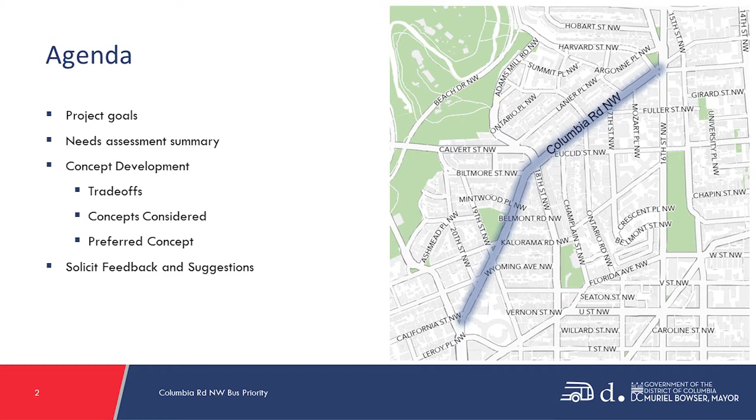We'll talk about DDOT's process for concept development, some of the trade-offs necessary to achieve the project goals, and concepts that DDOT evaluated for the corridor, including a concept that DDOT prefers at this point based on technical considerations. But we want to hear from you before making any decisions, and I will share the best ways to do that later in the presentation.

I am on the bus priority team at DDOT, and reducing travel time for buses in this corridor is a key goal. However, safety is a goal for every one of our projects, and this one is no different. All of the concepts I describe in this presentation will go through a design process that ensures safety is engineered into the roadway design.

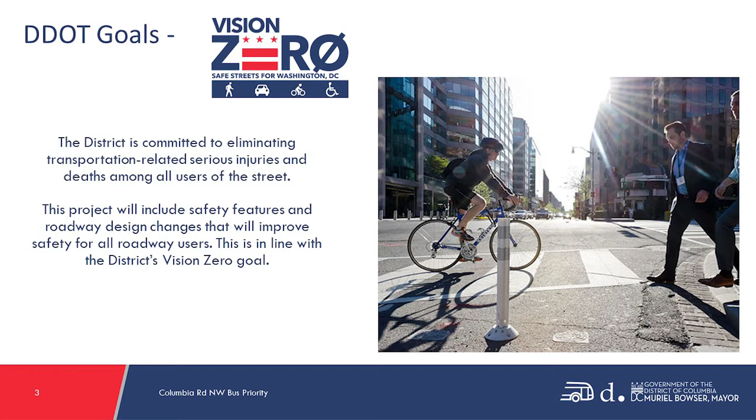The district is committed to eliminating transportation-related serious injuries and deaths among all users of the street. This project will include safety features and roadway design changes that will improve safety for all roadway users in line with the district's Vision Zero goal.

This section of the presentation will provide a brief summary of the needs assessment performed in the first phase of the project. This phase was necessary to define the problems we are trying to solve for. I want to sincerely thank everyone who commented during the needs assessment, because the information you provide by spending every day on Columbia Road is irreplaceable.

We received over 100 comments through the project website, emails, and in-person conversations with people on Columbia Road. The most frequent comment indicated that the corridor is unsafe for biking. Most commonly, people attributed that to parking violations, inadequate infrastructure, and reckless driving. People frequently requested protected bike lanes in the corridor and improved crosswalks.

Many people's comments included detailed recommendations and narratives. I read every one of these comments and appreciate the time people took to share their stories. This information will help inform the design as we move forward and make the project better.

Some examples of what people said in their comments: 'I'm sick of having to fear for my own and my loved ones' lives just getting around the city.' 'I think a lot more cyclists would use the street with a dedicated bike lane and space for multimodal transit users. Buses move so slowly through the space.' 'The 42 and 43 buses are so slow and unreliable that I often take the 16th Street buses instead, even though they're not as direct for my trip.'

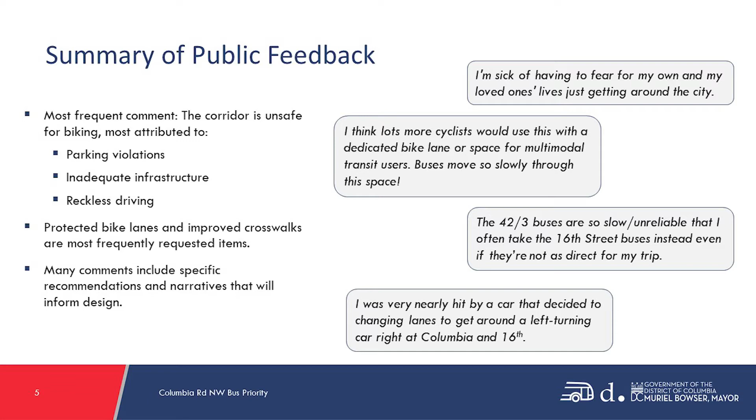This project is focused on solving a number of problems on Columbia Road that were determined during the needs assessment. You will hear these three problems and the goal of solving them throughout this presentation. The first problem we will try to solve is that there are unsafe conditions for vulnerable roadway users on Columbia Road.

Vulnerable user is a term that primarily refers to people walking and biking. They don't always make up the majority of people on the street, but they are more susceptible to injury and crashes. On Columbia Road, approximately 25% of crashes involved people walking and biking, but two-thirds of the injuries were people walking or biking. One aspect of this problem, seen in the image on the right, is that the bike lanes on the corridor stop and start intermittently.

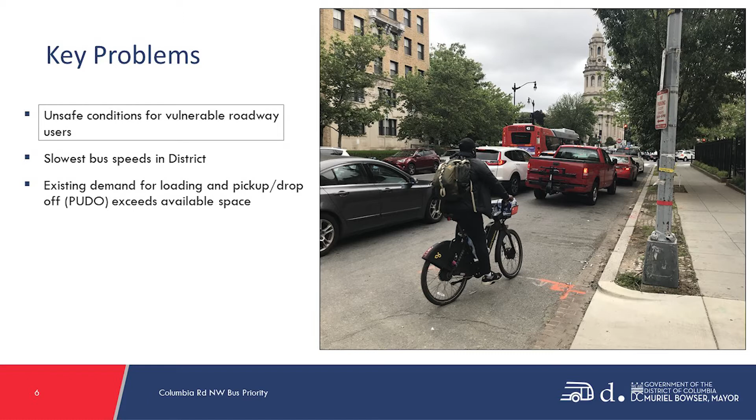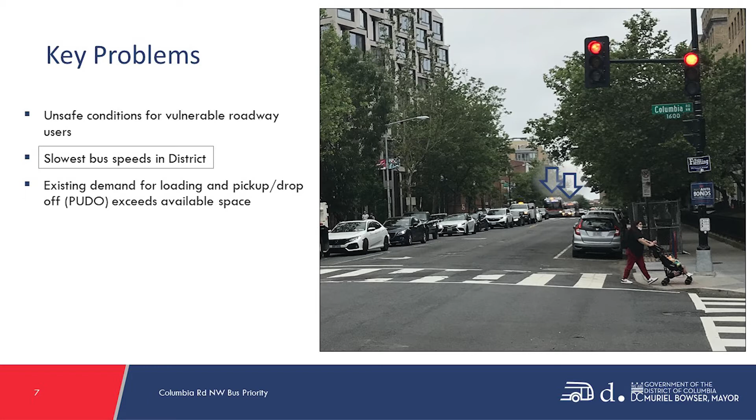According to system-wide performance analysis performed for the bus priority plan, Columbia Road had some of the slowest bus speeds in the district. In the image on the right is one of the worst locations for bus delays, on the approach to 16th Street. It often takes buses 4 or 5 minutes just to go from 17th Street to 16th Street. This project will aim to develop solutions to reduce their travel time.

Lastly, one of the great things about Columbia Road is the mix of ground floor retailers. However, it also presents a problem because the demand for commercial loading and pickup and drop-off, also known as PUDO, exceeds the amount of space available to them.

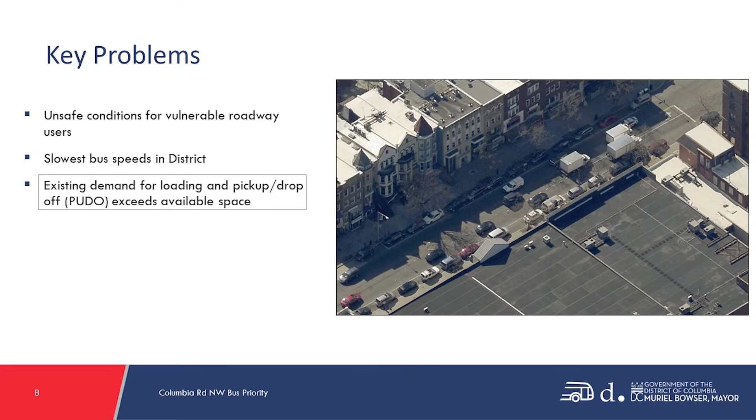Now I will go through some of the concepts proposed to solve these problems and describe the process to arrive at these concepts.

As part of the strategy for this project, we need to set priorities and see where we can get the most value from all these different roadway functions on different parts of the street. We are focused on three key requirements to solve those three problems: enhance safety, especially for vulnerable roadway users more likely to be injured or killed in crashes, reduce bus travel time, and better accommodate commercial loading and access.

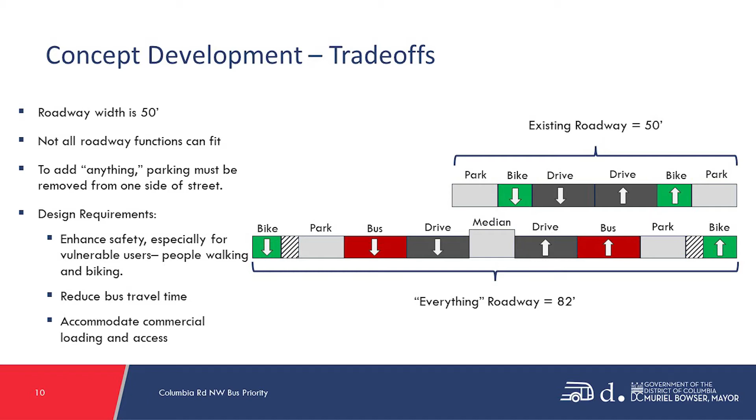When thinking about how to develop this concept, we divided the roadway into 4 sections, which each have unique attributes. The northern end, from 16th Street to 17th Street, has lighter loading demand but heavy northeastbound congestion, as I previously mentioned. Between 17th Street and 18th Street, there is extremely high loading demand, in particular on the block between Champlain and Ontario.

There's moderate loading demand on the other side of 18th Street to Belmont, where a number of restaurants and smaller grocery stores are located. There's also about a 20% reduction in traffic volume on the south side of 18th Street. Finally, on the approach to Connecticut Avenue, it's more residential with lighter loading demand, but there's moderate southwestbound congestion, particularly on the approach to Connecticut Avenue.

As part of our concept development process, DDOT evaluated 6 concepts and identified a preferred concept based on technical considerations and community feedback received during the needs assessment. However, prior to determining the direction of the project, we need to receive community feedback on how these concepts will meet the community's needs.

Again, the primary technical criteria we used to evaluate these concepts was how they address the issues on the corridor, improving bicycle accommodations, reducing travel time for buses, and accommodating commercial loading and access.

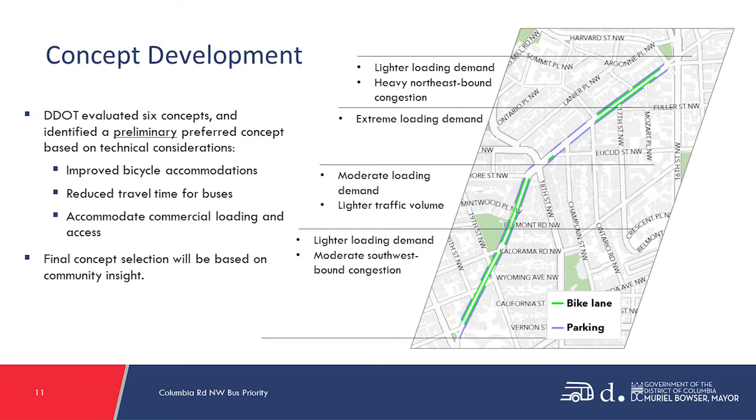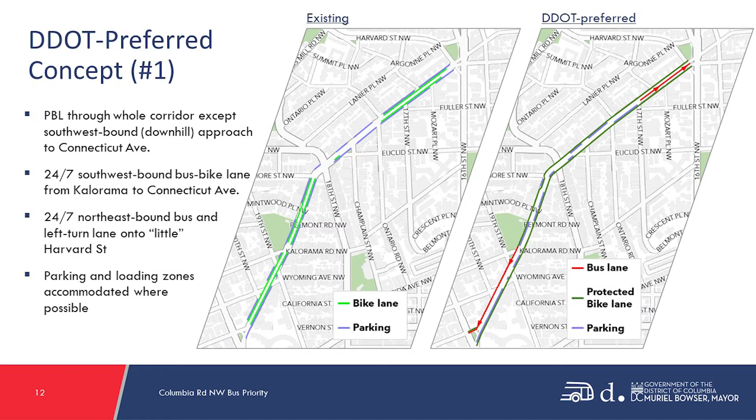First, I will tell you about the concept that DDOT prefers. This preferred concept would be a PBL through the whole corridor, except on the downhill southwest approach to Connecticut Avenue. It would provide a 24/7 southwestbound shared bus and bike lane from Kalorama to Connecticut Avenue, and a 24/7 northeastbound bus and left turn lane onto Little Harvard, starting at 17th Street. With this configuration, we would still be able to provide parking and loading zones on one side of the street through most of the corridor.

Another concept we looked at was a 2-way protected bike lane. This is an attractive option because it provides a protected bike facility with the smallest footprint, so you can still fit a parking lane and potentially also a second parking lane or a bus lane on some of those key segments that are the most congested.

However, there are several issues with this approach. The width of Columbia Road would require substandard lane widths for many of the roadway functions. For example, we try to provide 2-way bike lanes that are greater than 8 feet wide where possible. Another problem is that it does not allow a seamless connection with the future bike lane on Connecticut Avenue, which will be one-way PBLs on each side of the street heading up to Columbia Road.

The other problem is that it would require a 2-way bicycle movement through a shared bus boarding platform. That means people would be getting off and on the bus onto a platform that people are also riding their bikes across in 2 directions. That's something we can do in areas with lower bus and bicycle ridership, but it's less appropriate on this corridor.

The other thing about building a 2-way protected bike lane is that we try not to have any left turns across the bike lane outside of a protected signal phase, where there is a green arrow indicating that drivers can cross and make a left turn, and a red light indicating that bicyclists and drivers should not cross the street at that time.

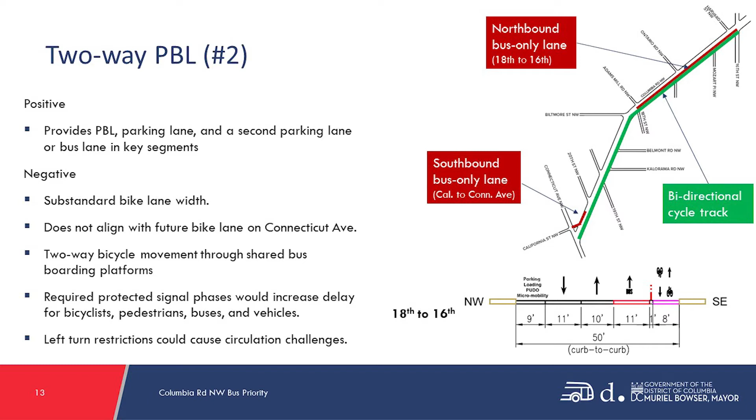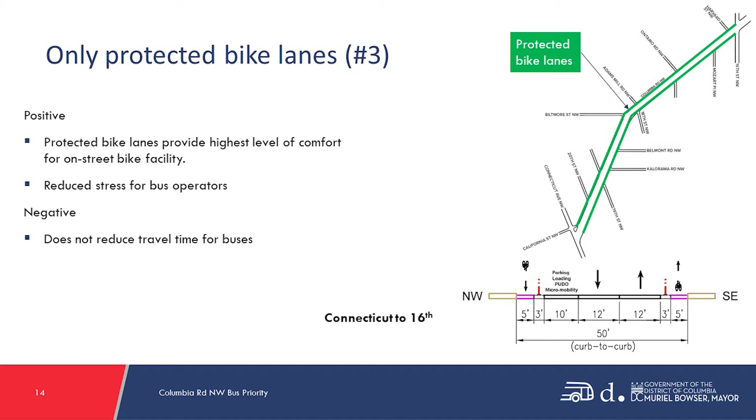The third concept that we looked at was to only add protected bike lanes. Protected bike lanes provide the highest level of comfort for an on-street bike facility. They also provide the advantage of wider travel lanes that would reduce stress for bus operators. The negative is that it does not reduce travel time for buses compared to some of the other options we provided. You will note that this is very similar to the DDOT-Preferred Concept, and the impacts to parking, which we will review shortly, are also similar.

In most of the concepts that we review, additional roadway functions are added by removing parking. This option goes a step further and evaluates removing a travel lane on Columbia Road for a segment in order to provide a bus lane.

As we already know, Columbia Road is one-way westbound east of 16th Street. This concept would extend that condition all the way to Euclid, such that cars can travel southwest but not northeast. Instead, beginning at Euclid Street, the northbound general purpose lane would become a bus lane. It's important to note that this concept is compatible with many of the other concepts we will be sharing on the south side of Euclid.

This concept would allow for parking on one side of the street between 17th and 16th, while the preferred alternative would remove parking from both sides of the street between 17th and 16th, and would allow reduced travel time for buses through the most congested part of the corridor.

However, based on analysis of turning movement counts, trip routing to nearby origins and destinations, and trip records from ride-hailing apps, Columbia Road serves mostly local traffic. This means that if a closure occurred, northeast-bound trips would not all be dispersed to alternative east-west corridors. And there is therefore a strong concern that many cars will still need to access Columbia Road, and so they will just do it from the other direction.

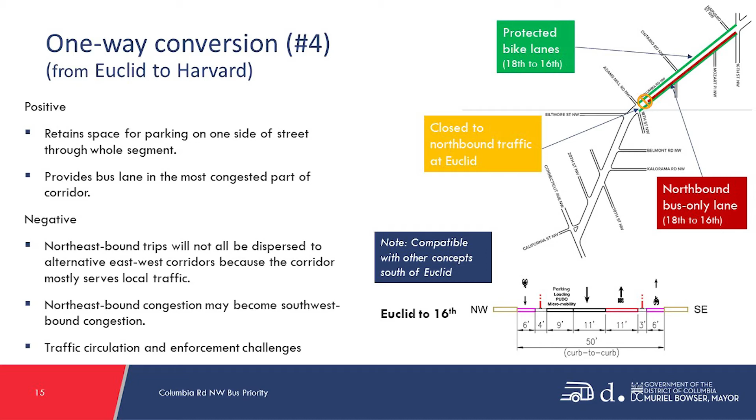One other concept evaluated for Columbia Road was shared bus-bike lanes, similar to what you see on 14th Street in Columbia Heights between Euclid Street and Irving Street. This concept would be applicable between 18th Street and Connecticut Avenue. It would also be compatible with other options on the north side of 18th Street.

In this application, bus lanes would be made extra wide at bus stops so that bikes can navigate around buses, and would potentially include protection to ensure that cars are not able to drift into the bus lane. The positive is that this provides a higher level of bicycle comfort, especially for a mix of different size and speed micromobility vehicles.

There is a growing number of types of micromobility vehicles on our roadways that are electric or unpowered, in all different sizes, and the growth in the volume and diversity of those vehicles is only expected to continue. These wider shared bus and bike lanes make it possible for them to pass each other as comfortably as needed. It would also reduce travel time along the whole southern half of the corridor for buses.

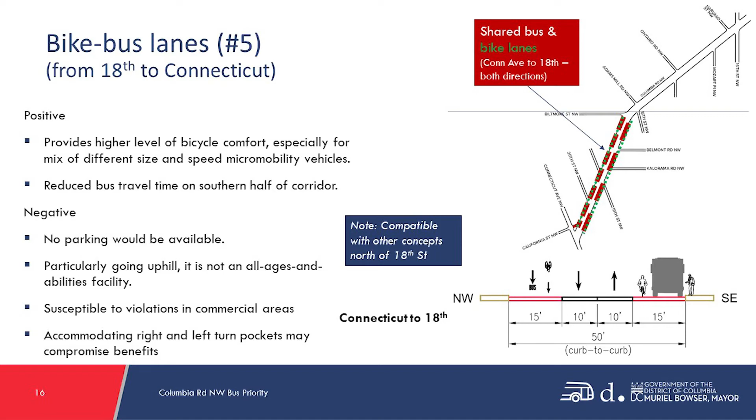The negative is that no parking would be available between 18th Street and Connecticut Avenue. This is particularly challenging because it makes it susceptible to violations, especially in the commercial areas. Also, going downhill, people are pretty comfortable riding in a lane that's shared with buses, but particularly going uphill, it's not considered an all ages and abilities facility. Also, the need for space to accommodate right and left turning vehicles through this corridor may compromise some of the benefits of the shared lanes.

The final concept is applicable south of 18th Street, and it's very similar to DDOT's preferred concept. The distinction is that it provides a protected bike lane for the whole segment of Columbia Road between 18th and Connecticut, by providing a separate bus-only lane for the southbound approach to Connecticut Avenue instead of a shared bus and bike lane.

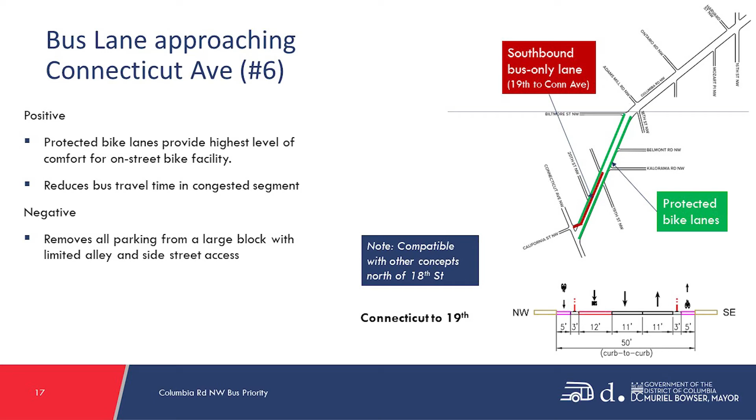The negative is that it would remove all of the parking from the block between 19th Street and Connecticut Avenue. This is a large block with limited alley and side street access and few alternatives for people to do pickup and drop off and parcel deliveries.

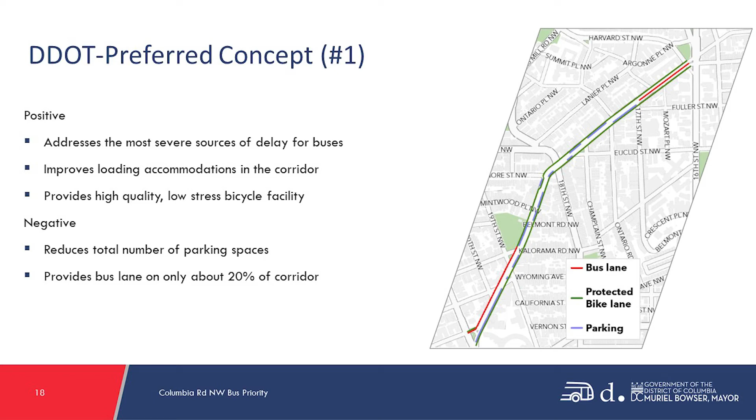The image to the right provides a more clear view of how the DDOT preferred concept would work near 16th Street. All of the buses heading northeast on Columbia Road take a left onto what's known as Little Harvard Street right before they reach 16th Street. However, they presently get stuck in traffic that is going across 16th Street. This concept would mean extending the left turn lane all the way back to 17th Street just for buses to let them bypass the queue of cars waiting to cross 16th Street and go straight to their left turn.

In present day, there is a bus stop at Mozart Place. In the proposed condition, that stop would be moved to 17th Street, and once the bus services that stop, it would move into a center turn lane for buses.

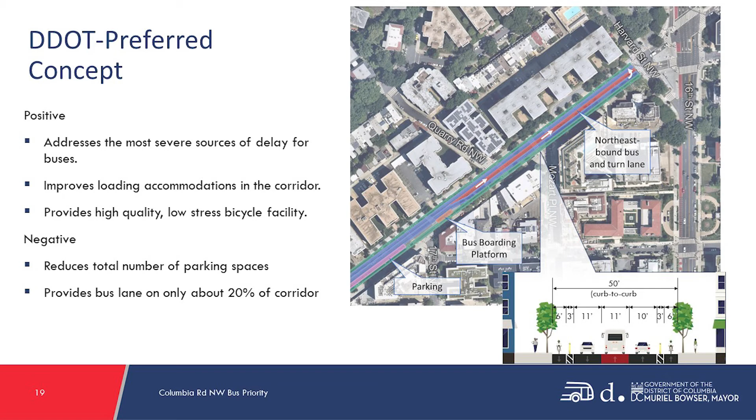The DDOT preferred concept would result in reduced parking availability. Just updating the roadway to DDOT standards would reduce the number of parking spaces on the corridor from about 200 to 180. This refers to the fact that DDOT has changed their standards to not allow parking within 25 feet of crosswalks or inside of intersections. Currently, the signage and pavement marking on Columbia Road allows parking in many such places.

Implementation of the preferred concept would further reduce the amount of parking spaces from 180 to 100. That is because there is not room to provide a protected bike lane in addition to bidirectional traffic and parking on both sides of the street.

Most of the remaining parking in the commercial areas would be converted to loading zones. The proposed time frame for these loading zones is from 7 a.m. to 7 p.m. from Monday to Friday. Outside of that time frame, general purpose parking would be permitted. I would also like to note that pickup and drop off, also known as PUDO, is allowed in these loading zones.

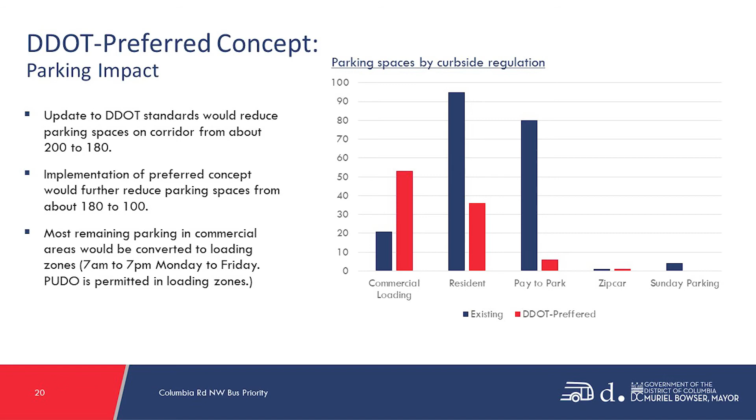Here's a more detailed view of how parking regulations would change along Columbia Road, with the number of parking spaces on each block and an estimate on how many spaces would remain with the DDOT preferred concept.

As I mentioned, the area near the commercial areas near 18th Street would become commercial loading. During the needs assessment, we worked to quantify what the total demand is for commercial loading on this corridor, which is to say, what is the length of all the vehicles that are providing delivery to those businesses at a given time. In developing these curbside regulations, we made sure that the length of the curbside available for commercial vehicles matched what the demand is.

Again, these loading zones are proposed to operate from 7 a.m. to 7 p.m., and outside of that time frame, it would be open to general parking needs. The parking that would remain in residential areas would keep the same regulations in place.

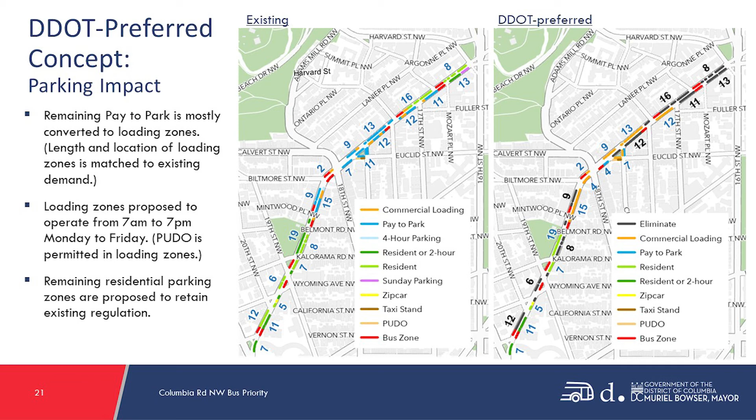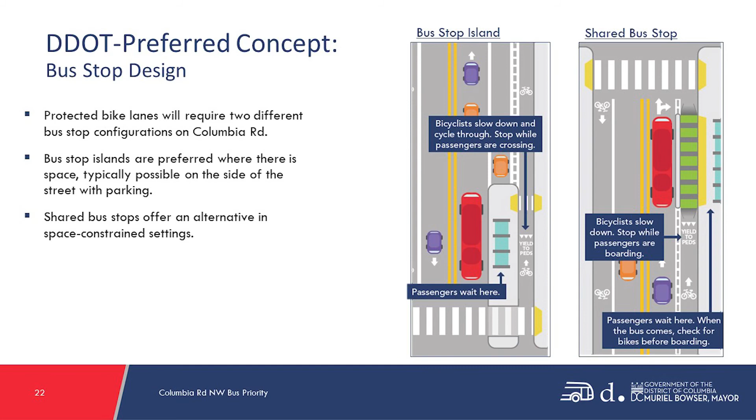For a shared bus stop, passengers wait for the bus on the sidewalk. Then when a bus arrives, bicyclists yield and wait for bus passengers to cross the island and board or alight the bus. Bus islands are preferred where there is space, which is typically on the side of the street where there is parking. Shared bus stops offer an alternative in space-constrained settings.

Another aspect of bus priority projects is to evaluate the amount of space between bus stops and see if there is an opportunity to rebalance that distance. The current average distance between bus stops on Columbia Road is 760 feet. For local bus service, it's preferred to have 4 or 5 stops per mile, which is the equivalent of 1,060 to 1,320 feet.

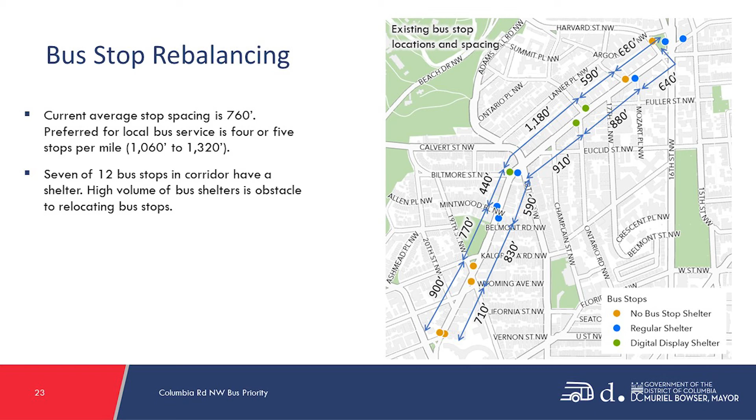7 out of 12 bus stops on Columbia Road have shelters, which is a high percentage and will make it more difficult to relocate bus stops. Through a bus stop rebalancing effort along Columbia Road, it would be possible to increase the average stop spacing from 760 feet to 1,140 feet, which would result in reduced travel time for buses.

Through bus stop rebalancing, there is also an opportunity to improve safety by moving stops closer to crosswalks with traffic signals and moving stops to the far side of intersections to improve visibility and reduce conflict with turning vehicles. Further design and community feedback is required before determining what the final bus stop locations will be on Columbia Road.

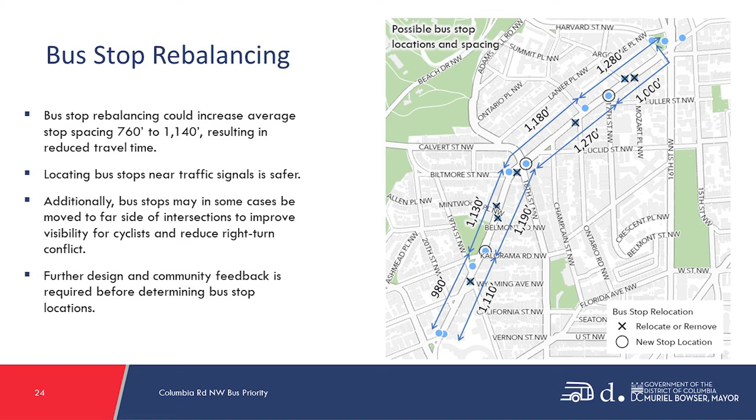Future further design and next steps. There are many details of this project that I have not gotten into at this point. At this point, we want to familiarize the community with the trade-offs associated with the different concepts so that we can determine what the high-level concept will be. Once we get into the design, we'll be able to determine a lot more details.

Regarding bus stop locations, the final concept that is selected will dictate the design of the boarding platforms, which impacts the suitability for shelters in different locations. So before we can make a specific proposal in terms of bus stop location, we need to select a concept and then receive public feedback.

There's an opportunity to make a lot of safety improvements on Columbia Road that I haven't been able to get into during this presentation, because where it's possible to do things like curb extensions, median refuges, improved crosswalks, etc., that will depend on the concept that's selected through this process. However, I want to make it clear that any one of these concepts will be focused on addressing safety issues in the corridor.

Another important thing for us to get public feedback on is the parking regulations. We know where and when commercial loading needs to be accommodated, but outside of that time period and in those locations, we welcome public feedback on what will best serve the community needs.

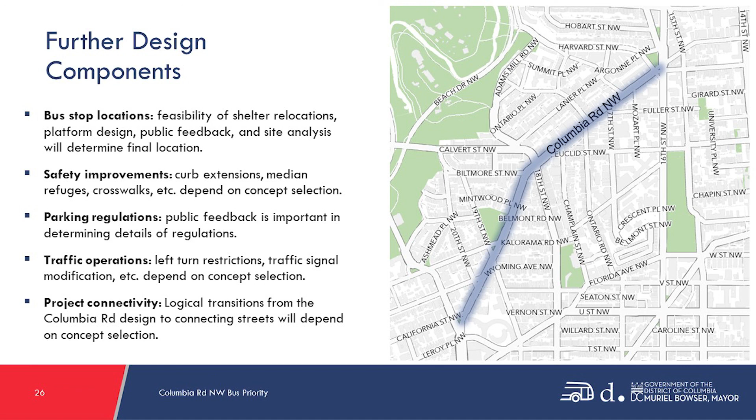The next step for this project is to continue with the public outreach and keep the conversation going about these concepts. I would appreciate it if you could get onto our website and provide feedback before September if possible, so that this fall DDOT will be in a position to select a concept and inform the community of that decision.

And then through spring 2023, we will be working on the preliminary design, and then we aim to have a completed design by fall 2023 so that we are ready for construction in 2024.

Some examples of the questions are, what do you think of the different concepts? Is there one that you support? Do you have feedback on the proposed bus stop locations? And does 7 a.m. to 7 p.m. make sense for the loading zones in those dense commercial areas? And then finally, what else do we need to know?

We already have feedback you may have submitted in the previous survey, so don't feel like there's a need to repeat yourself. But if there is something you would like to share, then we would like to hear it. You can email me directly at kevin.harrison@dc.gov. You can also call the bus priority team and either leave a voicemail or let us know that you would like for us to call you back.